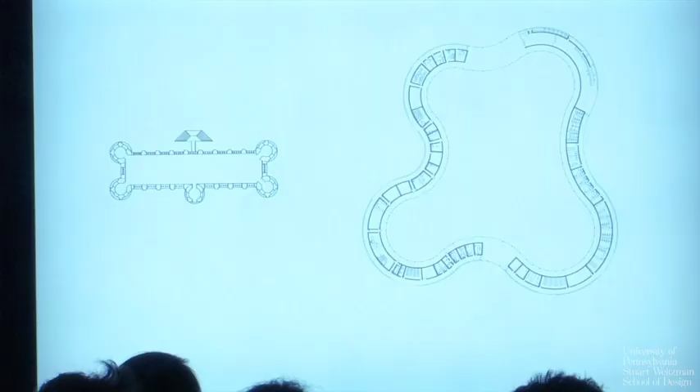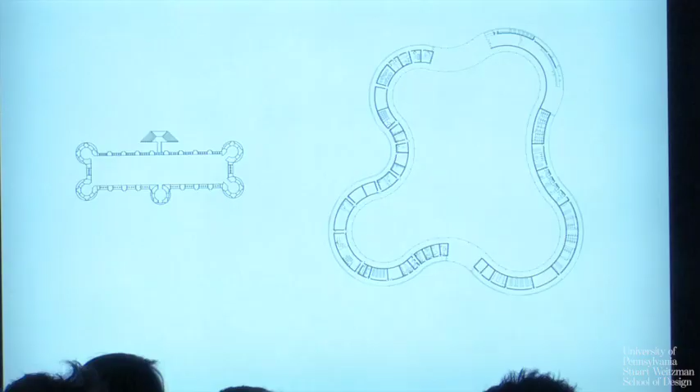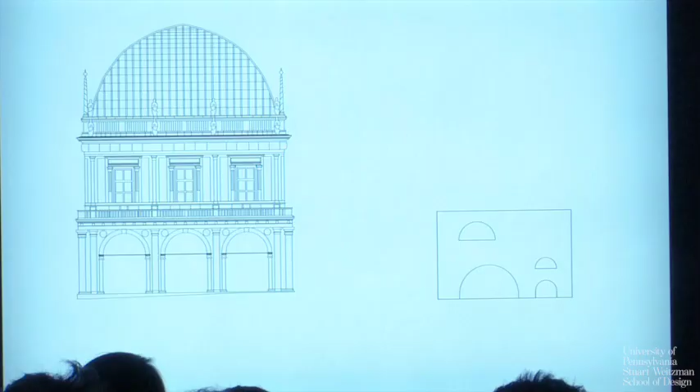After this exhibition, we wrote a short text titled 'On Continuity,' and inside this book there are several simple drawings like this one, where you always have a pre-existing building on the left, and the other is a project related to this pre-existing structure. These include forms of an old castle in Germany, a Palladian loggia in Italy transformed into a library, and the Venetian influence for a house in Beirut. We will see this project in Belgium.

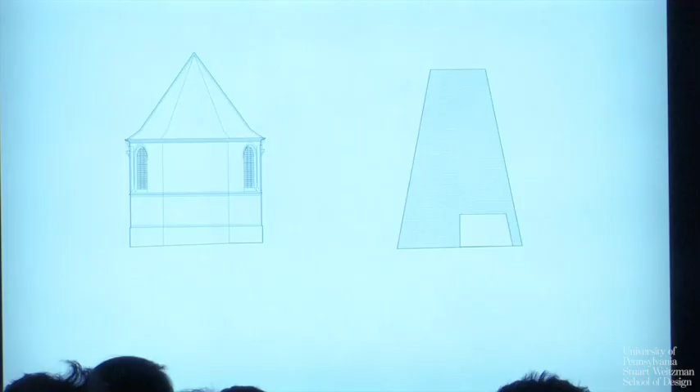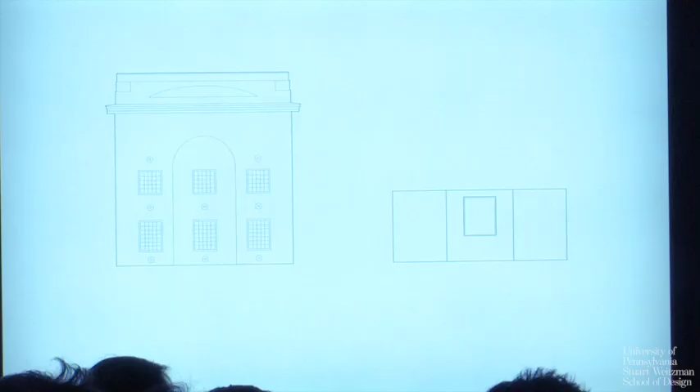So all our projects, in some way, really try in a simple way to find the identitary element of the pre-existing structure and transform it into something else. This drawing, for example, is for the Fine Art Museum in Chur, which will be the first project I present tonight.

In this project, the same identitary elements that exist in the old pre-existing building are, in some way, extracted and reused in the new extension. I forgot to mention that the majority of the projects I'll present tonight are extensions of existing buildings. So the first project is the Fine Art Museum in Chur. Chur is a small city in Switzerland, close to Zurich.

This is the original building from the 18th century that has been renovated by Peter Zumthor. They had two winter gardens there, and it's a bizarre building because it has a very clear Palladian influence, but there is an orientalistic decoration outside and inside, for a long story because of the former owner of this villa. And so the plan of the house was very inspired by La Rotonda with a double symmetry, very clear.

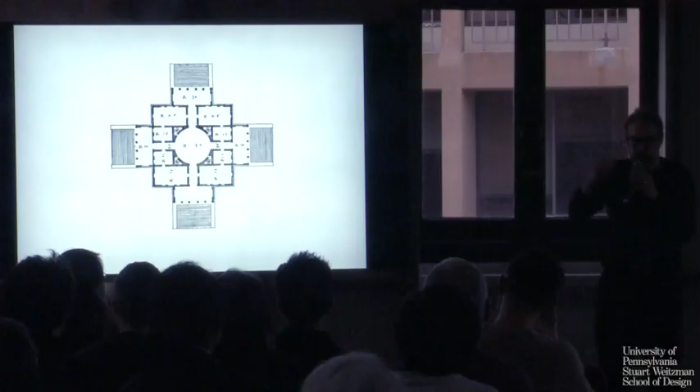In some way, this idea of an absolute architecture, trying an absolute architecture, something that describes an ideal, has been one of the first elements that marks in some way the strategy of the project. So we understood that the project should work in some way as a diptych with the pre-existing building. Again, the extension is centered above a double symmetry, extracting the geometry of the whole villa, and it tried to reduce all the complexity of a fine art museum to something very, very simple.

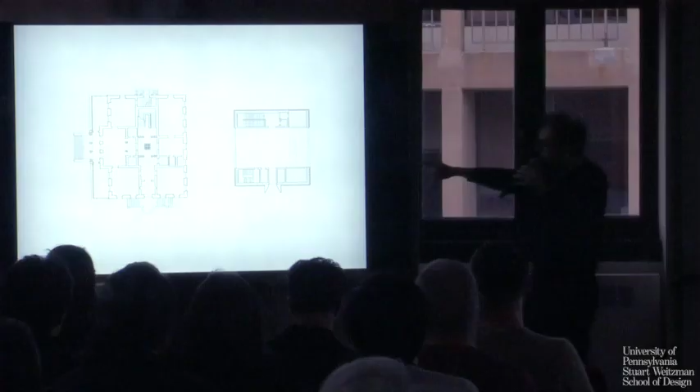It's conformed by two cores. I think I stay here, because it's... I'm so sorry, but it continues to be.

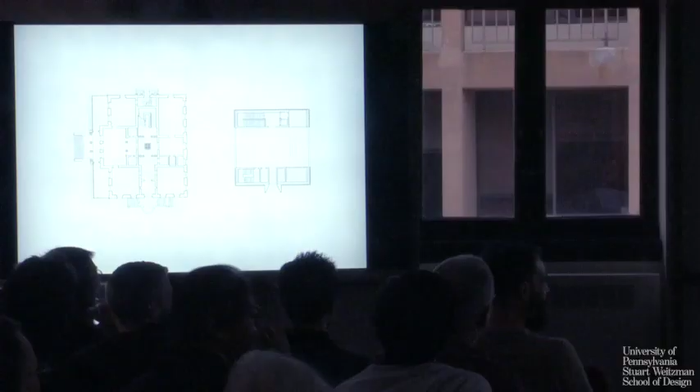So it's conformed by two cores, simple, one private, the other public, that conform a foyer, a small public plaza. And I like very much this drawing because it's a very synthetic draw. We try to solve the complexity with just a few things, very simple, but very, very precise in some way.

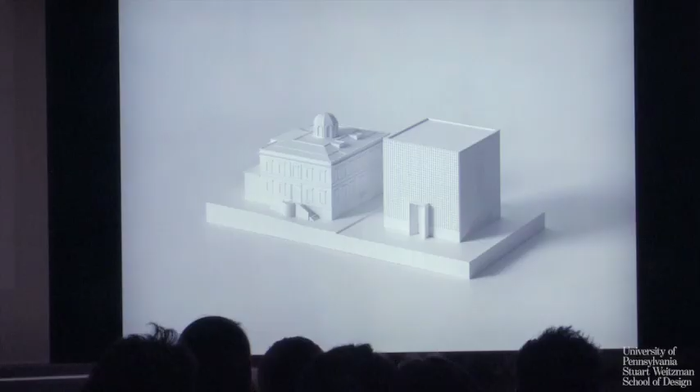What we have tried is to find the right scale of the building inside of this very sensible and delicate context. And in a way, I always say that this project is essentially a specific project for the place, but in some way it uses the same elements of the pre-existing building.

The new extension is a kind of new Palladian building. You will see the plan later, with this kind of facade, which is a bas relief, that is related with this kind of orientalistic aspect that conforms the pre-existing building. And this is what we understand for this idea of working in continuity with something.

Try to reuse or extract or select some very local, very specific element that gives identity to a place, and build a new narrative for a new project with this element in some way. This permits at the same time staying in a historical line, but at the same time there is always a gap in some way, always a deviation, you know. And this permits the architecture to move forward in some way.

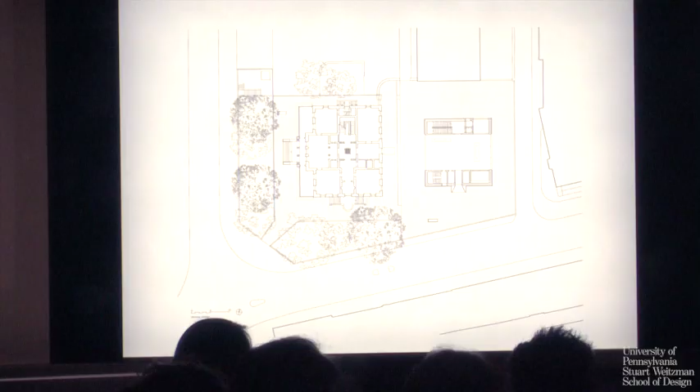And this space is crucial because for us it explains a kind of civic attitude. All our projects really try to create public space, and all our projects are really modeled by the reflection about the public space.

Also in this project, which apparently is very compact, just a very restrained object and box, what for us was really important is the space in between the buildings that permits the building to breathe in some way, and find the right scale to insert without any kind of friction or difficulties the building into the context. It's also another important aspect of this project.

In order to achieve this small public space, the programmatic organization was quite radical. We proposed in the competition to put all the exhibition gallery in the basement, essentially, and the emerging architecture is just dedicated to the public function. It's pedagogical space, foyer, etc.

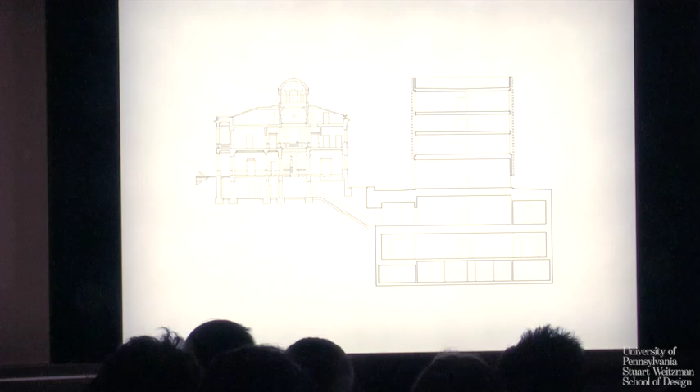So apparently our projects are quite restrained and simple, but there is always a kind of very radical interpretation of the program, like in this case.

The foyer, this small public space, declares the relationship with the pre-existing building. The facade of the historical building is the facade of the new foyer, of the new building. From there is a very generous stairs that go down to the -1 level, and here you discover this Palladian idea that informs the project.

The museum is composed by a sequence of very simple rooms with different proportions, that are organized with a different combination.

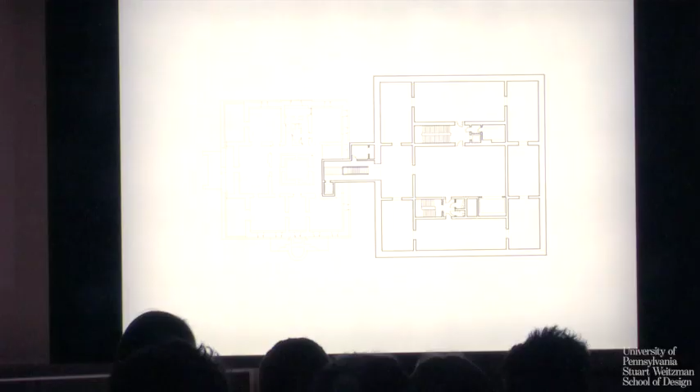And this plan could be a Palladian plan. If you look at all the villas made by Palladio, they are always a combination of a sequence of rooms, in some way. Some images of this.

This level, here there is the underground connection with the spaces that have been restored by Zumthor in 1982, I think. And when we arrive at the lower level, dedicated to temporary exhibition, you discover our effort to reduce the project to just the structure.

There is just the two cores, one public, the other private, and the space in between is a flexible space for exhibition. There's nothing else. We tried to achieve in this case the maximum size for the exhibition and reduce architecture to its minimum. So in some way, structure and programmatical use are combined in this simple, very simple form.

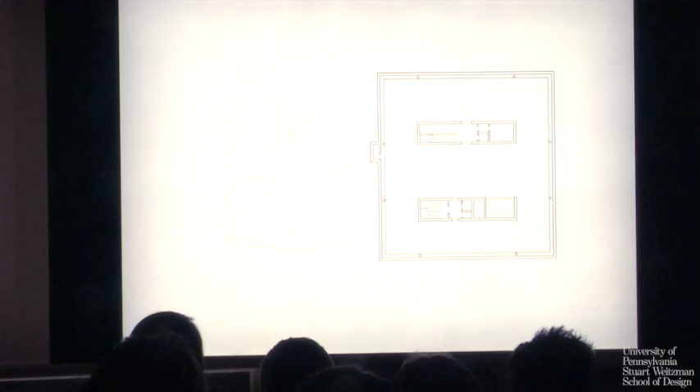So, as I say, the other important element of this project was this kind of facade, this kind of ornamentation, let's call it like this. And conceptually, this element was related with the Orientalistic decoration that conforms and really marks the identity of the historical building.

But this element is not at all an ornament. It's a technical element made in prefab concrete with a very sophisticated carving, let's say, that permits creating brise-soleil for the exhibition on the upper floor, and also hides all the technical elements that this type of building has, etc.

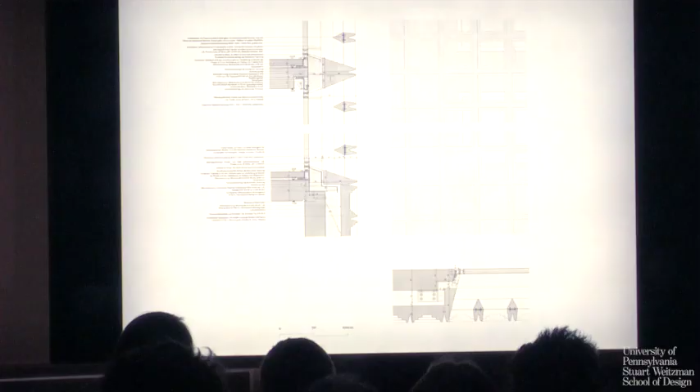So, as I say, it's an element that assumes different meanings. From one side, conceptually related with the historical building; from the other side, it has different technical meanings. You can notice here the facade with the brise-soleil.

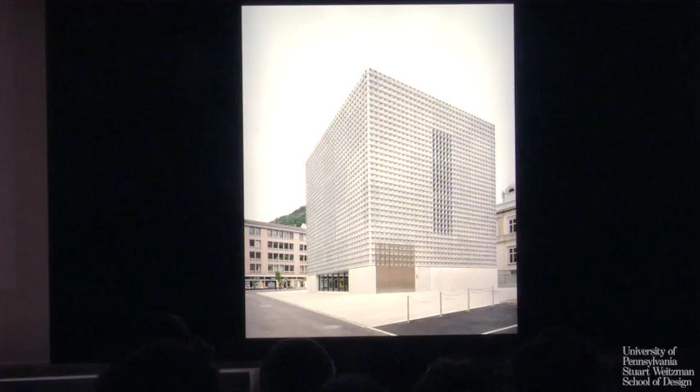And in this last image, you can discover and understand how the building, the upper part, is very compressed, very compact in some way, and this continues underground. You can also notice the importance of this small public space that creates a kind of plinth, on which the upper box is deposed and sits.

Just one last comment: we made the loading dock with the same carved surface. And this is a little bit the secret, a technical secret of this project, because in order to reduce the building, achieve the right scale, and get more public space with the right measure in this context.

We propose to use the foyer as a foyer, the most noble, important part of a building, but also as a loading dock. So during the night, the trucks enter through here and park in the middle of the foyer.

And the false ceiling that you have seen in the foyer is not a decoration. It's an element that permits extracting all the gas or the smoke of the truck.

We are really interested in making every aspect of the project have more meaning, respond to different necessities, and also create different or unexpected synergy between different programs. This is an example: the most noble part with the most dirty part of an art museum. And this permits creating a very compact, very efficient building in which every part is absolutely necessary.

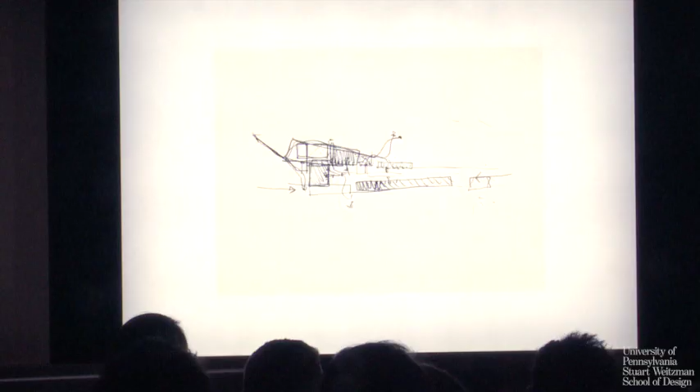In these initial sketches, you notice that what was important was not just where to put the building, but the central esplanade, the central plaza that is able to link this quarter with the plaza in front of the train station. This simple diagram defined the urban strategy in which the core is this elongated empty space, and the architecture is just the frame of the public space.

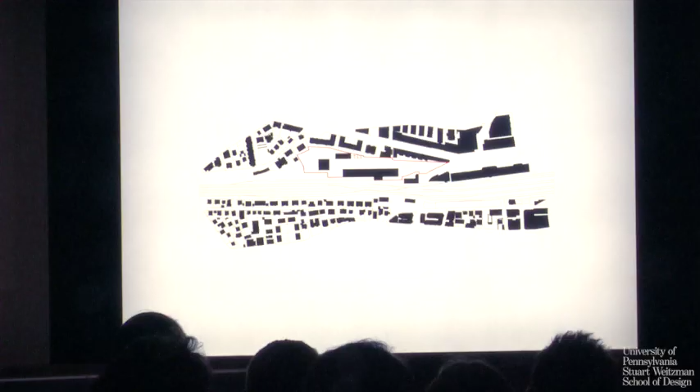This is the master plan that we presented with the 3 museums, and our project was this elongated element that you can see in the bottom part. After taking this decision to first approach the project from an urban point of view, a broader view, the architectural project arrived very easily in some way.

The project is an inhabited wall, an element able to divide the new public space from the railways placed behind the building. It's a kind of limit. Very simple. But if you notice, there are some protuberances in this bar, and these are fragments of the pre-existing building that we preserved, reused, and integrated into the project.

For us it was very important to open this central plaza, and for this reason we removed several buildings. On the other side, we thought that the memory of a place, the identity of a place, could be restored by the preservation of a series of fragments that create a kind of constellation into the sides.

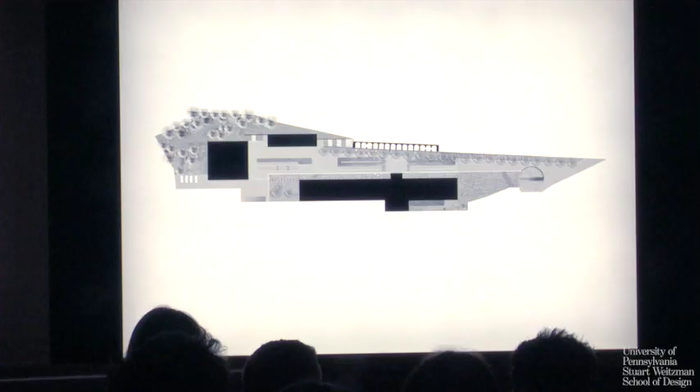In this type of huge transformation, because for a Swiss project, a very large project, it's very easy to lose the character or lose the identity of a place. This strategy permits us, at least, to preserve this very specific condition of this place, the reality of this place.

So the project is a simple elongated block, very permeable on the north facade, and very opaque from the other. It's a very specific building. Here in the middle of a city is a kind of industrial area dedicated to the trains, the station, etc. And the building at the end is a kind of industrial building.

It's a container for art made entirely in brick, like all these old fabrics. But again, what is really important here is not only the building, it's this plaza, this space, that permits the rediscovery of this entire area.

Then the project is a frame of the public. As I say, we kept, we preserved certain elements. In this sketch you see this element of the old building with a very beautiful arched window that becomes the main motif of the building.

From this side, the building is completely opaque due to regulations that exist in Switzerland — you cannot open any kind of window towards the train if connected with the gallery, let's say. But that small pre-existing element really became the starting point of the architecture, the element that links the project and roots the new project in this place.

So the ground floor is very simple. This structure is about 150 meters long — I don't know how it is in feet, but it's very long. It's composed of a sequence of different cores that divide all the functions.

And the ground floor is a kind of extension of the public space into the building. But you notice the entire plan starts with this protuberance, which is the element that gives a link with the memory of this place.

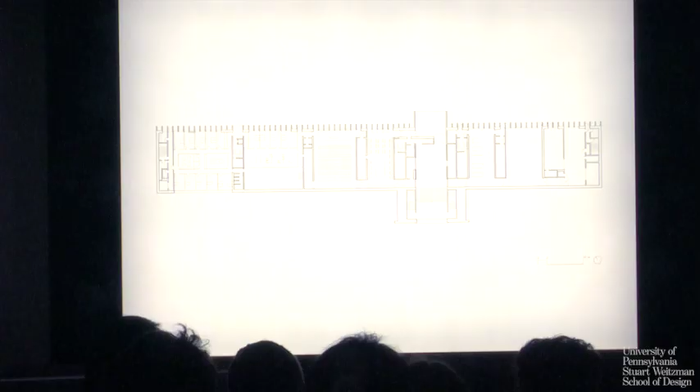So from the other side there is this portal, you enter, you cross a very compressed space, and then you discover this new foyer. And this image for us is a kind of manifesto. It explains visually what is for us this idea of working in continuity with something existing—this beautiful arched window facing south, that was the most emotional element of the pre-existing building, has been transformed, and continues to be the main feature of the new building, but completely reinterpreted in some way.

So being in continuity means for us staying aligned, but also creating a deviation. There is always a gap in some way, and this is what permits architecture to move towards the future in some way.

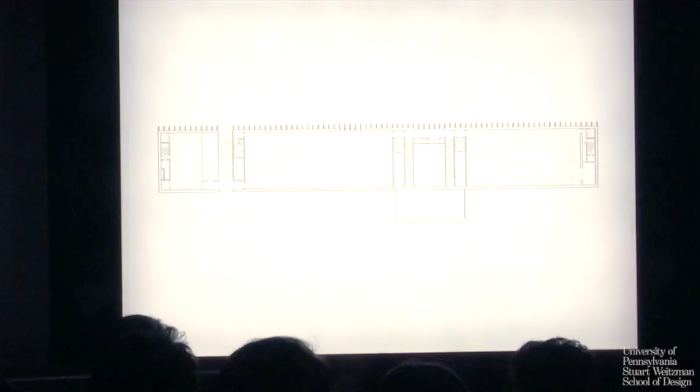Some other images of this space: there are the stairs going up. The brise-soleils on the northern facade introduce a very beautiful northern light into the gallery. And again, like in Chur, you notice how this building is built with just 5 cores that create vertical connection, dividing the space for permanent and temporary exhibitions. So the entire complexity of this type of building is solved in the most simple, synthetic and dense way.

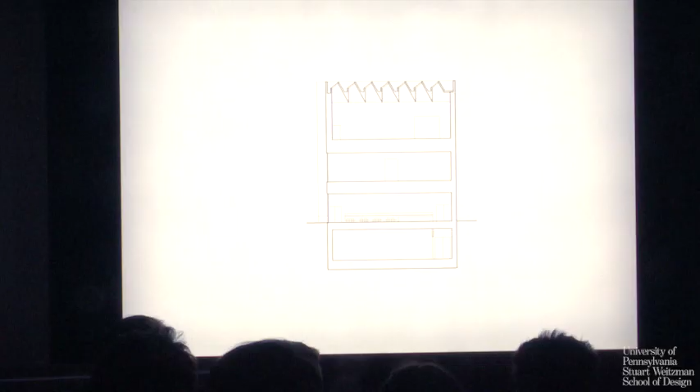The main characteristic of the gallery was the light that arrived from the roof, which was very complicated because the building was placed west-east, so the light arrived from the longer side. And these are some images of this gallery—one of the biggest galleries in Switzerland, more than 600 square meters. But it seems that this roof sits effortlessly into the gallery and permits a very beautiful light to enter from the north.

So these 2 projects have been very important for us, and the last image explains that everything sits above an in situ concrete plinth, and then it's built with this kind of brick—essentially a clinker, for technical reasons, but anyway. So these two projects have marked really an important moment of the practice. We learned a lot doing that.

And the evolution of these ideas, in some way, appears in this new museum, which is the first time I'm presenting it as a kind of new project, because in fact it's not yet finished—we will finish in 2 weeks. It's again not exactly a fine art museum, but it's related with art, in a city called Kortrijk in Belgium.

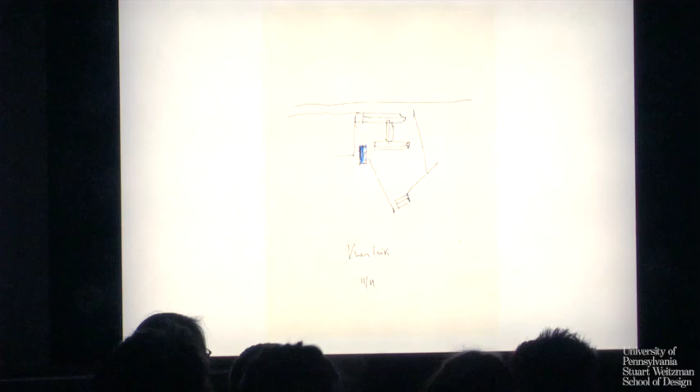And facing this is another very beautiful park in which there are the remains of old walls, etc. So we started with this condition, and the project has been very, very simple. We tried to understand the story of this place, which has been composed by aggregation of simple pavilions, and we, in some way, just added a new pavilion to the complex. In these sketches, we again tried to interpret which are the identity elements of this place.

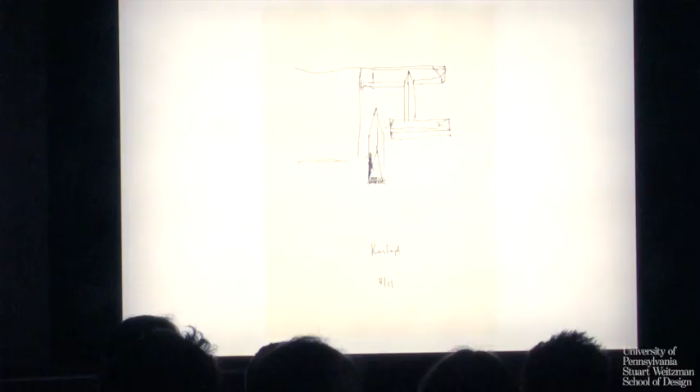So the urban strategy has been very, very simple. With the position of this new element, we were able to reconfigure the old cloister, and also to manifest the presence of this new museum into the park.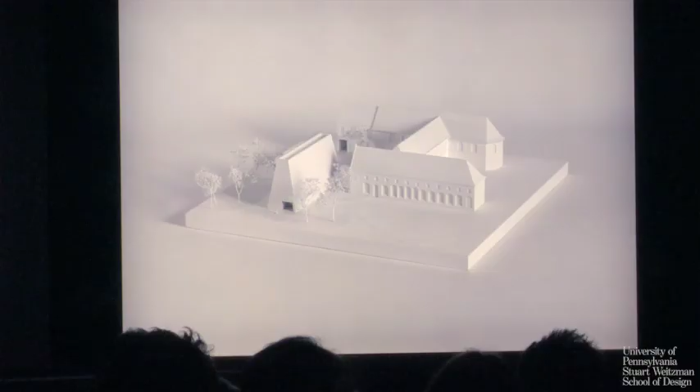So the model clearly explains the juxtaposition of this simple element, and the new pavilion is essentially conceived as just a roof, a shelter in some way. It's something related to all these other very inclined roofs that characterize the chapel and the other dorms and this part. So here you can see the relationship of the new pavilion to the park, which marks a presence.

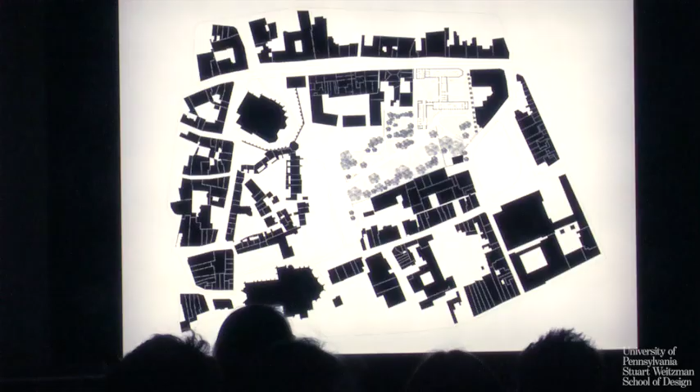But it also has a very precise urban value, because it permits for the first time to cross the new cloister and exit into the upper street in some way. Again, this idea is to make a public building which is really open and permeable, and for the public. So the strategy has been very simple: from one side, we carefully restored the historical element. You can notice we had new walls and one new core, etc.

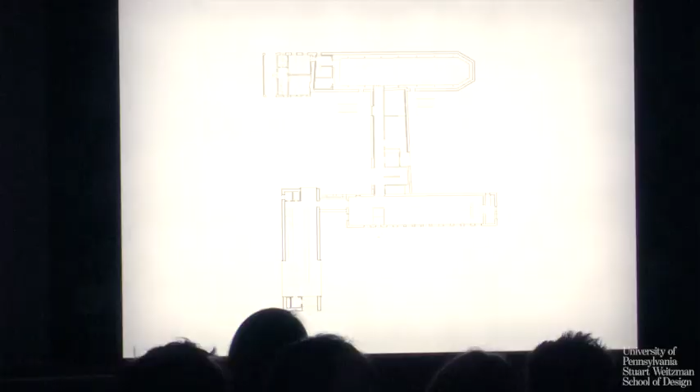And then in the new pavilion, we put a kind of flexible space called a living area for the city, which is a restaurant, but also a bar, and also a place for exhibition, lecture, etc. And here are some images that we took two weeks ago.

You can see it's still not very finished. We will inaugurate in 2 weeks, so we are a little bit late with the landscape, but we will arrive in some way. So from one side, we restored, for example, we remade a big part of the wall facade using old brick, because it had been destroyed by the intervention in the 60s. We were very careful, making very punctual interventions, as you notice here, for example.

Now we insert the new core. So from one side it's very delicate, the most sensitive approach that we are able to have, and from the other side appears the new pavilion that marks its clear presence in the park. The park, we will finish also in a few weeks.

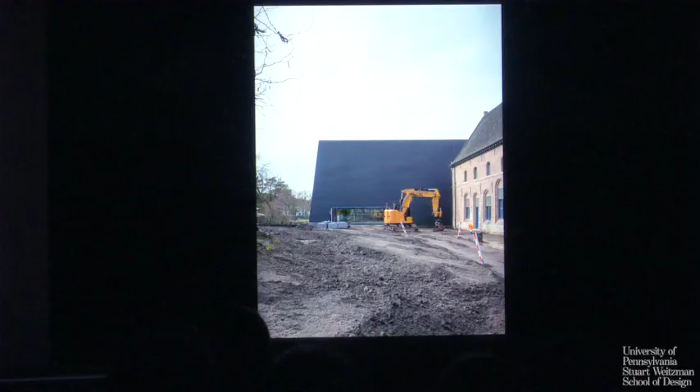And suddenly, in a way, it's really the continuation of the story that we started with the previous museum. For me, when you see this type of relationship between the new pavilion and the old pavilion, there appears this kind of continuity in some way. It's a completely different thing, this kind of very monolithic, a little enigmatic new piece, but in some way it speaks, at least for me, the same language.

I speak about it being a kind of roof in some way, related to the materiality of the old roof, and the environment is very beautiful. There are two very important churches. You can notice also these pinnacles that appear there. So in some way we really strive with this project to integrate it in the best way with this sensitive environment. And I think this project really describes very precisely what we are doing right now, conceptually speaking.

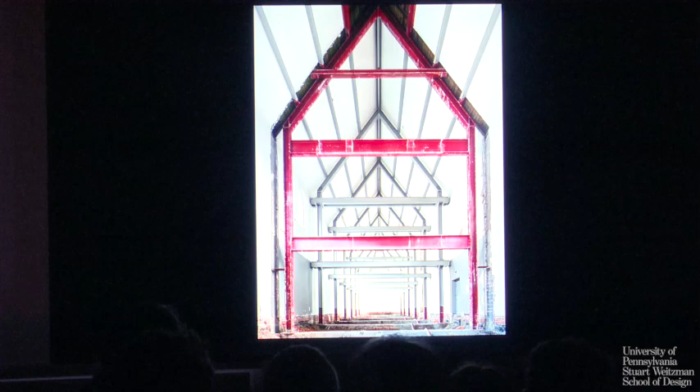But the idea was to relate this place with historical halls that exist in Belgium, heavily decorated in many cases. In the historical chapel, in the 60s, they put 3 floors in the middle of the chapel. We took out the structure, kept just the element, and transformed it into a new art space with a very simple element, using curtains, preserving the structure like this, and using the curtain to filter the light.

Also, the project has been a very low budget project. Another part we have restored, just restored. But again, here there is a secret. They asked for 2 state-of-the-art galleries for visual art, and we placed them under the 2 courtyards, really in order to keep the building above free, and create public space again.

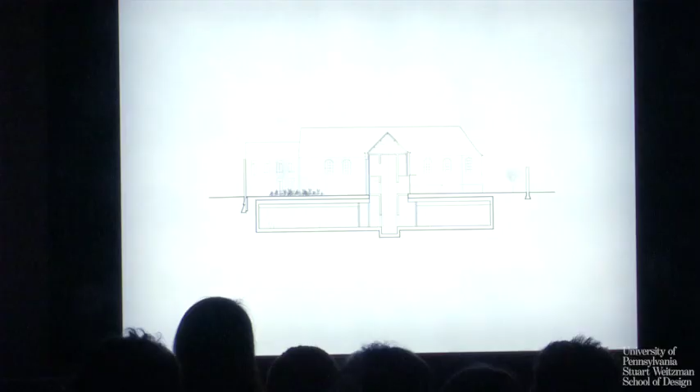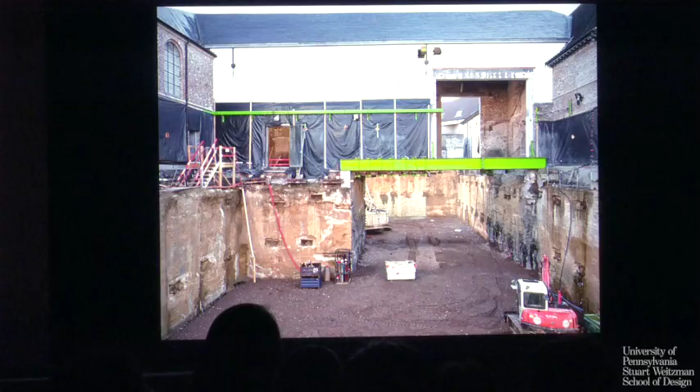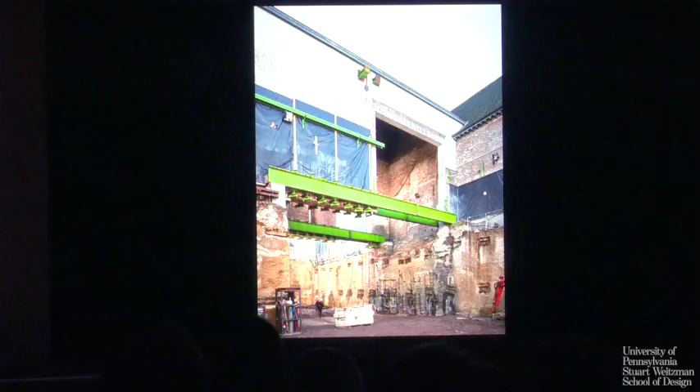So it's a similar strategy like Chur. This is the lower level with the 2 gallery spaces, and the intervention has been very difficult. You notice we essentially suspended the historical building, we curved down, and we made this type of intervention in order to create these 2 very pristine galleries for visual art.

And then from outside you don't notice anything in some way. This project has been a continuous moving between history and future in some way, and the transition between the dorms and the pavilion - this is looking towards the dorms, this is looking towards the new pavilion - manifests a little bit the continuous movement of the project.

The entire building is not exactly brick. It's essentially a recycled brick made from 70% waste from industrial construction. In fact, the aspect was a little bit like crystal, and we cut the brick in order to achieve this kind of materiality.

So the last 2 projects are 2 projects that we are currently working on at the office. I will present them very briefly. One is the Fine Art Museum for a city called Göteborg in Sweden. It has been a very important project that we won last year, I think 2 years ago or something like that.

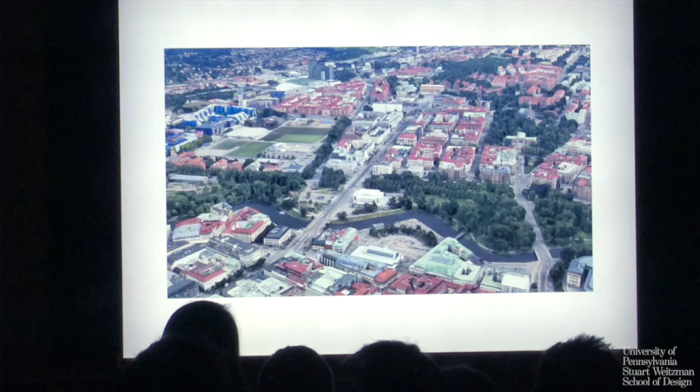They created this big avenue, and at the end, following the idea of Nordic classicism, they created a kind of acropolis. They ended this very big urban axis with the Fine Art Museum, and on the side the theater and the opera. It's really a kind of acropolis, also because it sits above a hill.

So this is the building. It's a very massive, too massive, very impositive building, made I think in 1930 or something like that, for a universal exhibition that was held there. This was intended as the ending point of this very long and important urban axis, with the theater and the opera on the two sides, right and left. It's not a very interesting piece of architecture—it's more like a mausoleum than a fine art museum.

The interior is typical of that period. This is the upper floor, with zenithal light, just to give a sense of the proposal.

The site of the competition was just behind the museum. They wanted to increase the size of the gallery behind the museum.

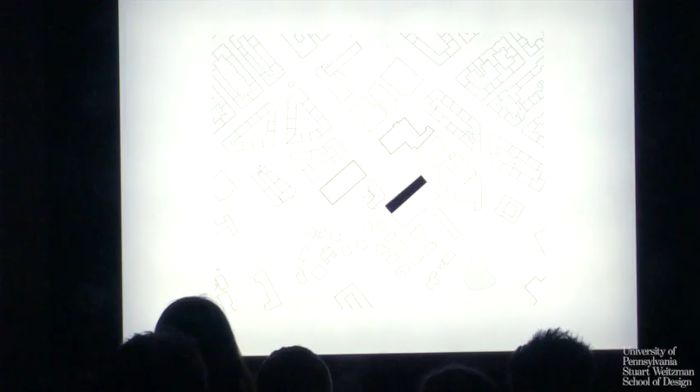From an aerial view, you can notice how there are two very different conditions: the formal one, looking towards the opera, the theater and the axis, and behind it a residential area, very nice, made of small brick houses with a lot of vegetation. So in some way the museum marks a clear distinction between these two urban areas.

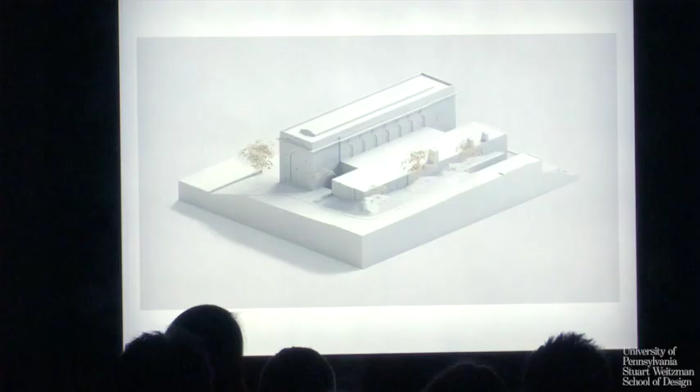So these sketches explain that we wanted to work with the organicity of this area, with the vegetation, etc. Instead of making a freestanding building, we made a very discreet and simple building, a kind of plinth, connected with the original building through a light yard. In the model you can notice the relevance of all the topography surrounding the building, which allows us to insert the building into the topography.

So here you can see the building, and you can barely notice it. The fact that the museum marks a difference between these two urban areas is the starting point of the project. We wanted to preserve the character of this more residential area and not disturb it in some way.

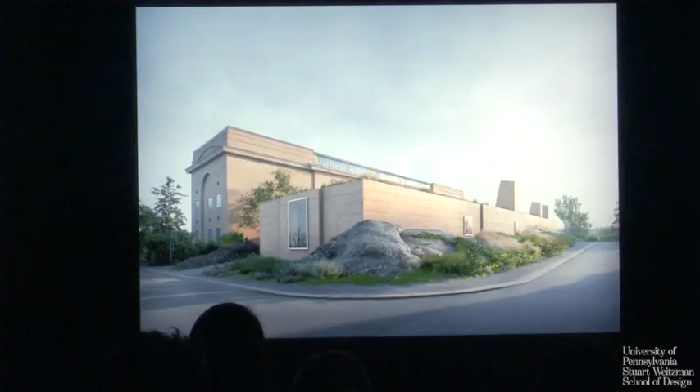And here is a general overview of the proposal. So rocks, topography, the fact that we really wanted to preserve the presence of the original south facade towards. And then for sure, when you make a project, we wanted to interpret a context, but

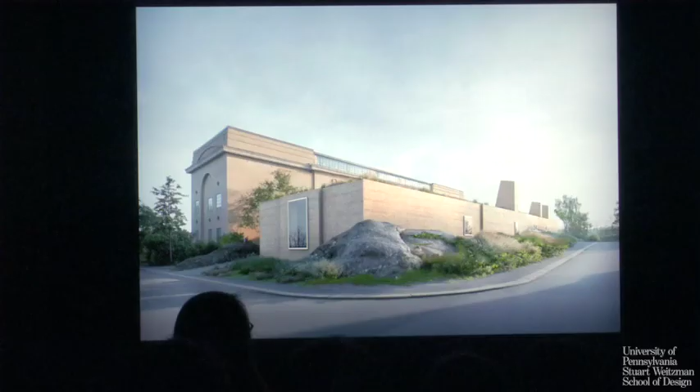what's a context? In a context, exist many realities. There is a material, a physical reality, but also a kind of imaginary, literal reality. For us, for example, in the same way that when we made the Philharmonie in Stettin, we had in mind a certain expressionist architecture.

The Philharmonie is located close to Berlin, and this type of architecture in some way marked the architectural history of that place. Here for us, the presence of one of my favorite architects, Sigurd Lewerentz, has also influenced the design. Suddenly appears this vertical, strange element, which is the skylight, like in the churches of Lewerentz, in which they create this kind of unstable element.

The building is very simple, just a plinth. But then there are these elements that create a kind of transition or distortion, let's say like this.

So the building for us is able to establish a dialogue with the physicality of this place, but also in some way with the discipline, with the other architects that operate in that area.

There is also another subtle difference between the buildings. We wanted to build the museum using the same brick as the original, but create a much more big and rough joint. Again, Lewerentz, but also a methodology, a material element that permits creating continuity with the original building, but also gives it autonomy and independence.

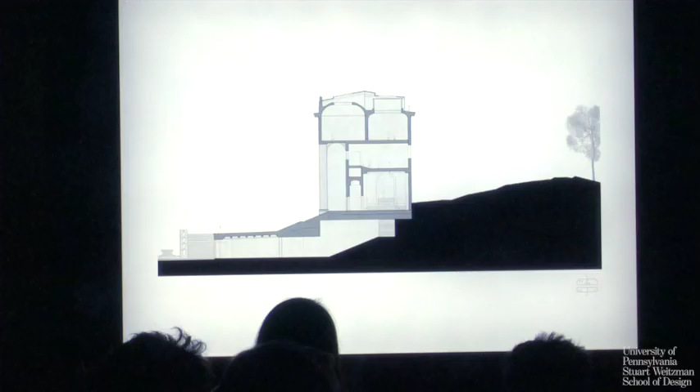The project is very complex. I don't have time to finish, but everything is solved with this. This is the current state, and this is the section.

Again, there is this programmatical approach. We organize all the new exhibition area just in one level, here. Instead of taking the gallery in different levels, we said, okay, all the new galleries are placed just in one level, and in the upper part, what is visible are really the service area, the atelier, etc.

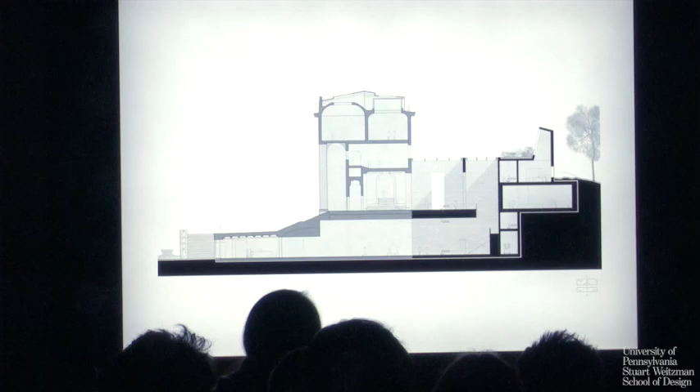And in this way, it's all about how to enter from the original, the historical plinth, cross the tunnel, and go up. This is a restoration and refurbishment of the old foyer - you enter the tunnel and arrive into the building, and the light arrives from this northern light at the top, and you go up and arrive into the light yard.

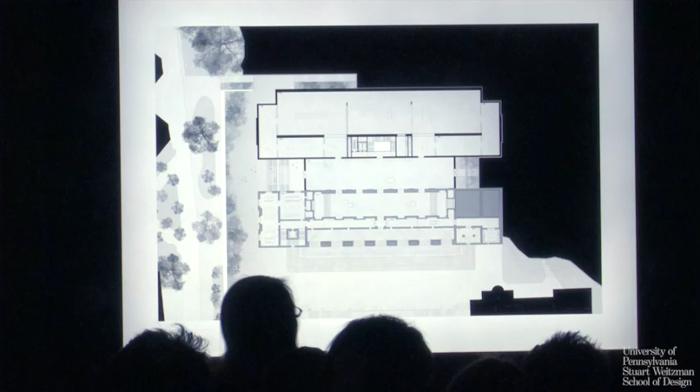And also the geometry is very well related to the original building. In the upper part you can see all the galleries are located just on one floor, and this permits the visitor to understand that there exist two types of museum, the historical one and the new one.

And this is the light yard. This new public space will be open from the side, you can cross it, and it's really an exercise of balancing the new building and the historical building, in some way.

The last project, which I'll tell you about in 5 minutes, is a project that I really like. It's probably one of the first projects we will build here in the US, and it represents for us a new opportunity to work in a context we never worked in before, very different from the European context. So Oolite Arts,

let's go. It's very sensitive. Oolite Arts is a non-profit foundation dedicated to promoting young artists, and it operates in Florida. Essentially they wanted to build a building which is an artist residence to host around 20 artists and offer them studios, and create also a very important educational program for the community.

The mission of this organization is to transmit to society the importance of art. They want to create community. They want to be a good neighbor, they say. So they want to promote young artists, and also they have this kind of social mission with the educational program.

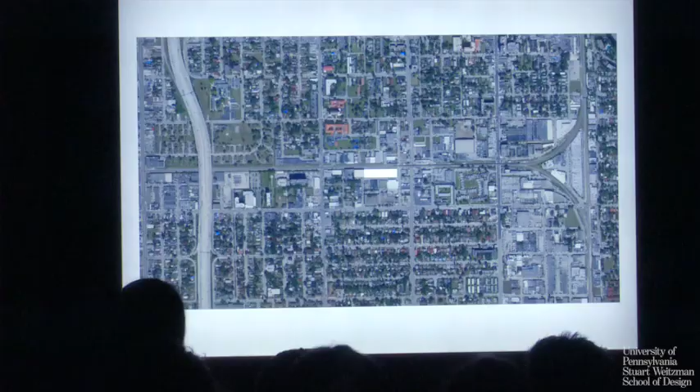It's located in the north of Miami in a district called Little Haiti. You'll notice the site is along the railways in a very harsh environment, full of warehouses. It's also a little bit of a dangerous neighborhood of the city, but there are a lot of art galleries moving into that area. So these are the streets around the site, just to give you a feeling of what we have.

Our plot is exactly to the right of this image. This warehouse will be demolished—a very low building, a precarious and temporary environment. We never worked in this way before. All the projects I presented were based on a relationship with something existing, but here the question was how to operate, how to build architecture in this condition.

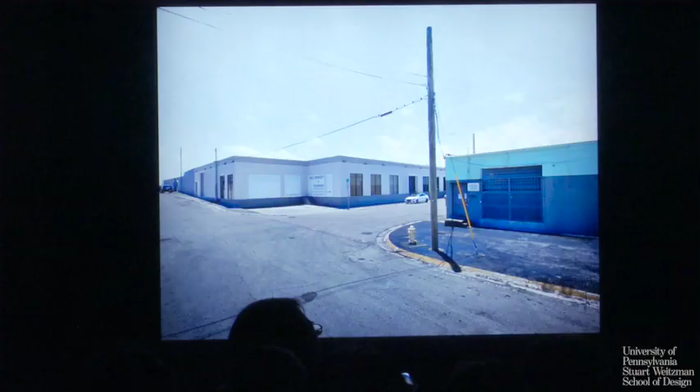The strategy for us came from an interpretation I received from a professor in Italy. He told me, 'Look, Fabrizio, you didn't have a context, or the typical context in which you operate, so in this project you have to build not just a building, but your own context in some way.' That's exactly the strategy we adopted.

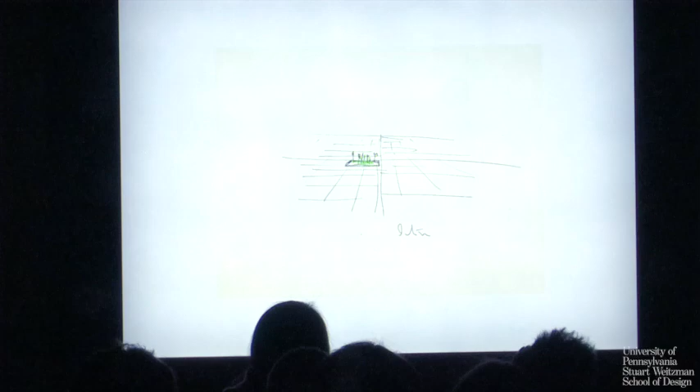Very briefly, the goal was how to create community, how to create this space for artists but also for the neighborhood. The first idea was to create a garden—we're in Miami, so we had the possibility to create this kind of exuberant garden. A room that contains a garden.

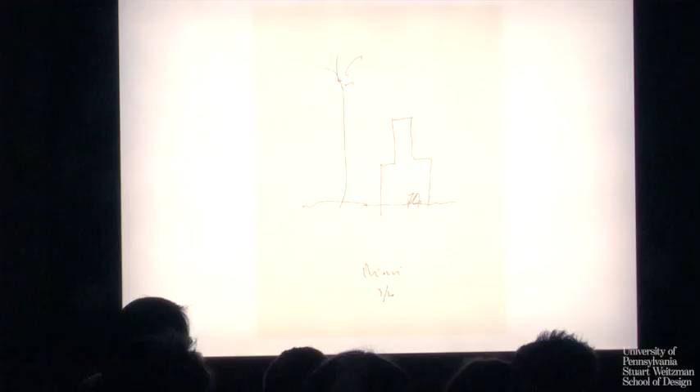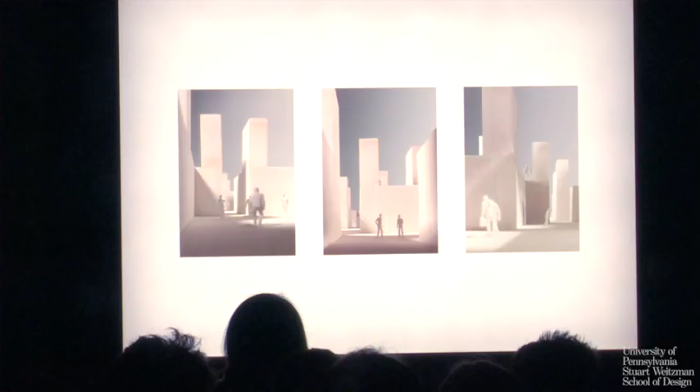We understood this project was essentially the repetition of a very simple basic form. What's a studio, an artist studio? Just a room, maybe with a window, and even better if that window is north oriented—so a room with a skylight. This was a kind of epiphany in the project: starting with a very simple element, we were able to produce an artificial landscape.

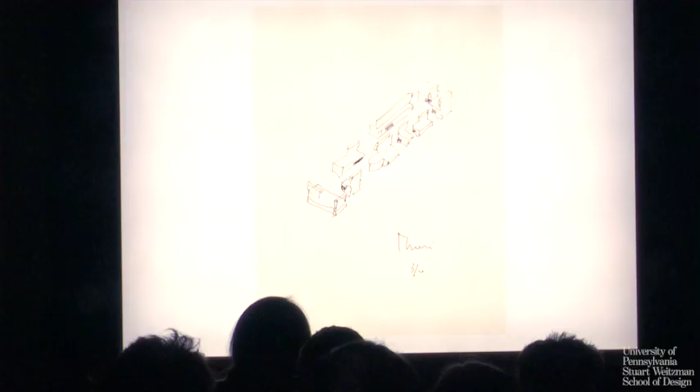These are study models of the office, and we used this cell to try to create a landscape, an artificial landscape, to create the context that we didn't have in that place. So we started to rationalize the position of these rooms, making it more systematic in some way.

Then we organized the entire building along the side. This was quite radical because the client was shocked—they had the freedom to build 14 floors and expected a vertical building, but we decided to go horizontal because it was, for us, a better way to create community and permeability into the project.

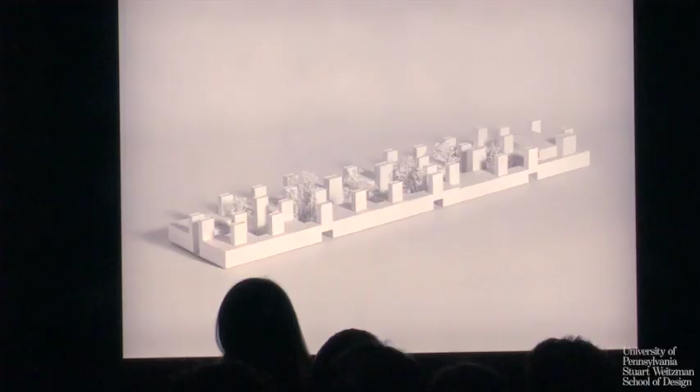So we created this new access on the short side as the main entry, and we created a kind of interior garden that crosses all the building. Step by step, starting from this isolated cell, we created essentially a continuous plinth from which all these towers—essentially skylights—appear.

It's really the creation of an artificial landscape more than an object. This promenade ends with the auditorium located in the lower part. You can notice how you move through the different clusters here—this is all public garden in some way—and you can enter through here, and through the north and south sides.

At the very end, for us, this is a kind of village or small town for artists. I like very much this juxtaposition between downtown Miami and this new village for artists—a very simple structure, just that.

It's a bit of an enigmatic thing, apparently very hermetic, but it's very permeable—you can have the main entry from the west, the main facade, and two openings towards north and south, also because there was a security requirement, let's say.

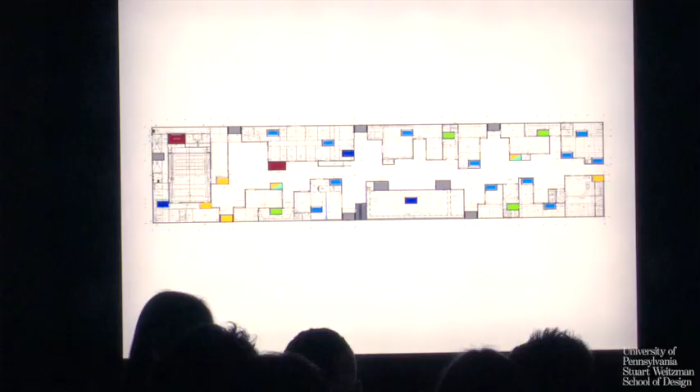So, working with engineers, we started to use this element to create a complete bioclimatic system—a system that controls the climate passively. Some of these towers are skylights looking north, some are solar chimneys looking south, some are wind catchers that take the breeze arriving from the ocean, not far to the east, and some others are water tanks. All these elements together create a device to passively control the climate of the building.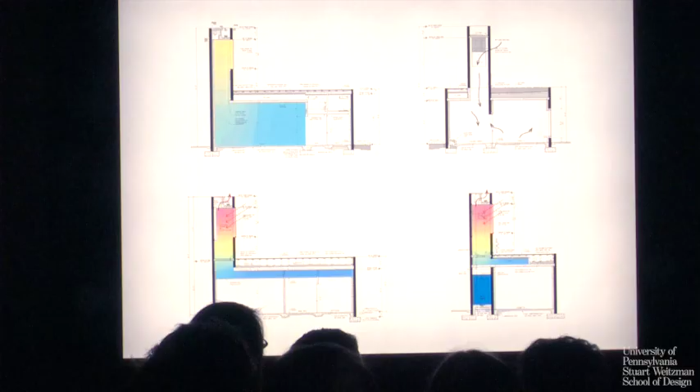At the very end, we tried to go for a fully passive building. The client didn't accept it, because it's still very difficult here in the US, especially due to energy costs, to convey the importance of this climate strategy. But even though we still have air conditioning, we use all this system to create natural ventilation and reduce the use of air conditioning, because this strategy creates a natural breeze and ventilation into the building. So the building ends up displayed with all these technical objects appearing above—the plan itself is very simple, composed of seven clusters.

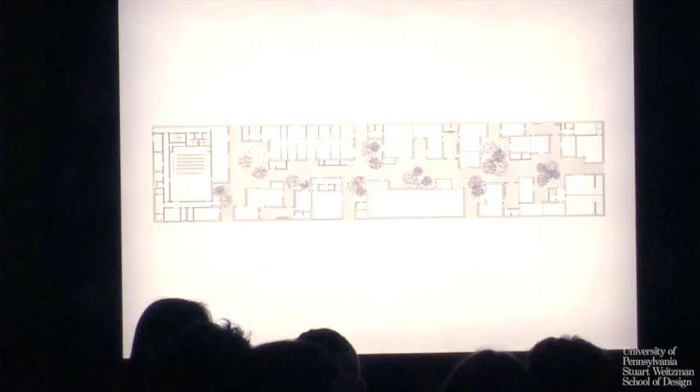Every cluster they have 4 or 5 studios, and there is also a gallery, an auditorium, library, etc. Everything is on one floor, and you can enter into the studio through a porch, a kind of enclosed garden that permits entry.

And this is the sequence. This is the main gate in some way, which you enter, and when you enter, you discover that the context, the landscape, was in some way missed. The idea is to create this garden using just autochthonous vegetation, and this tower that appears there creates this kind of place that for us is at the same time very public, because people can enter and move through the organization, but also very intimate and private for the artist in some way.

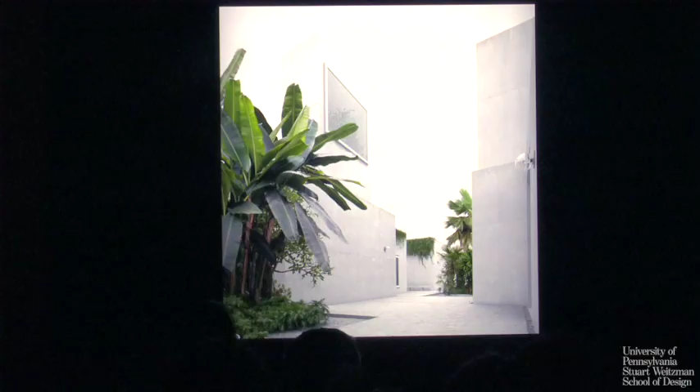So, the project is different because the contextual conditions were different in some way. This is really an explanation of our research about making specific architecture and trying to avoid generic architecture in some way - the porch through which you can enter into the studios, and the studio itself, the artist studio, are the two main elements.